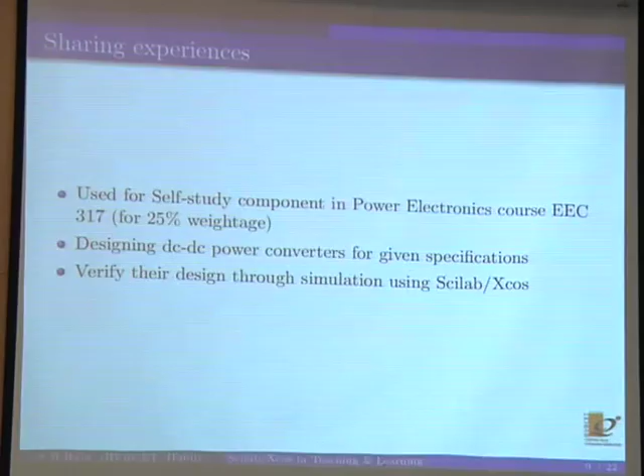For example, the output voltage must be something for a given input voltage, the current ripple should be something, and the voltage ripple should be something. These specifications are given, and then you verify the viability of the solution through Scilab XCOS simulation. This is one example I'm showing you.

This is a Cuk type DC-DC converter. Basically, we write state space equations for this converter to work, for when the switch is on and when the switch is off. These equations I use for simulation, and if you simulate it using XCOS, it will look something like this.

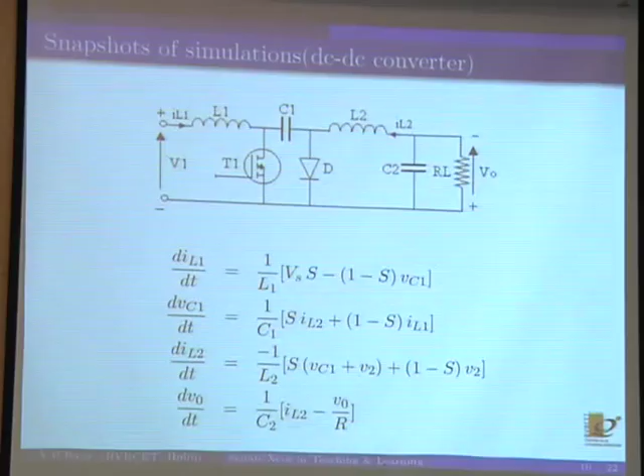If you look at this, there are four state variables, two inductors and two capacitances, so you get four differential equations. You have four big components here, so as to simulate this power converter.

I'll show the output here. The first graph represents the currents through the two inductors, and the other represents the voltages across the capacitors. I have given the specifications, and these are the simulation results for particular component values.

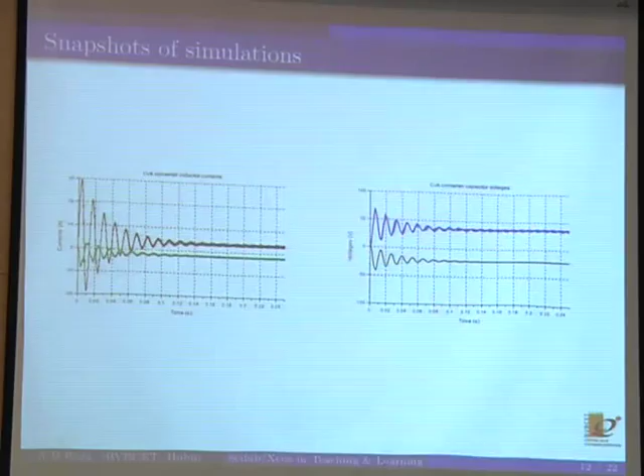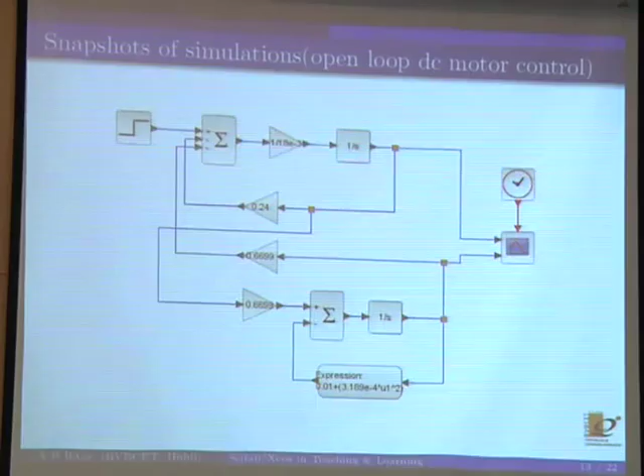This is an example of a control system, open loop speed control of a DC motor, where they study that as the load is increased on the DC motor, the speed is going to come down. Now how do I do it in closed loop? I use XCOS for doing this.

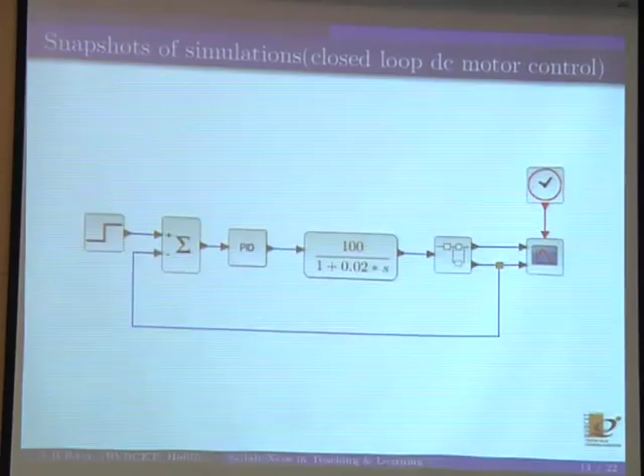On the input side, I give a step input, setting the speed command, and here there is a PID controller. The students will be changing the parameters and seeing what happens, so it's an exploratory kind of thing.

These are the graphs. For the first one, the set speed was 100, and next it's suddenly changed to 200 radians per second. This DC motor is driving a pump type load, so as the speed increases, the torque also increases, which you can visualize by noting the armature currents.

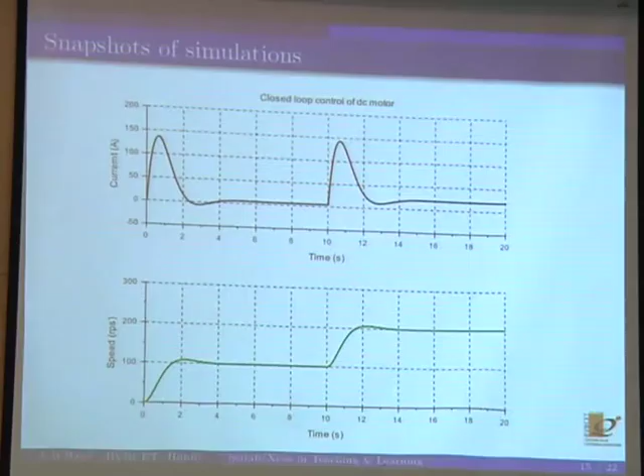I use this for the application of design of experiment principles in the electrical machines laboratory. Basically, I have a physical system or process with an input, an output, and control factors. I do experimentation by changing these control factors in a particular fashion, perhaps a full factorial design, following DOE concepts. I gather the data and then do statistical analysis to come up with a mathematical model.

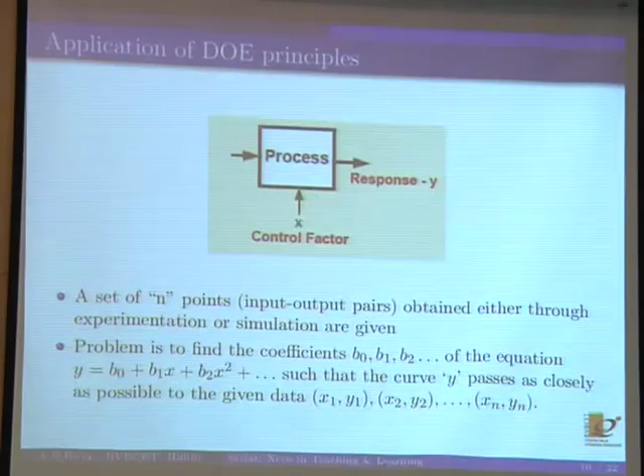The mathematical model will be like y equals b naught plus b1 x; it can be quadratic or cubic as well. This was done on a DC motor. Although in electrical engineering we know the DC machine equations and I can predict it, this perspective is different because we look at the DC motor as a black box with control factors, so this model is for statistical purposes, an empirical model type.

Unlike C, C++, etc., it's easy to learn, and emphasizes more on problem solving. You don't have to worry about the syntax etc. It strengthens theoretical concepts during problem solving because you will be working mostly with mathematics or equations. Model implementation is based on signal flow graph or block diagram approach - that's where we see the advantage.

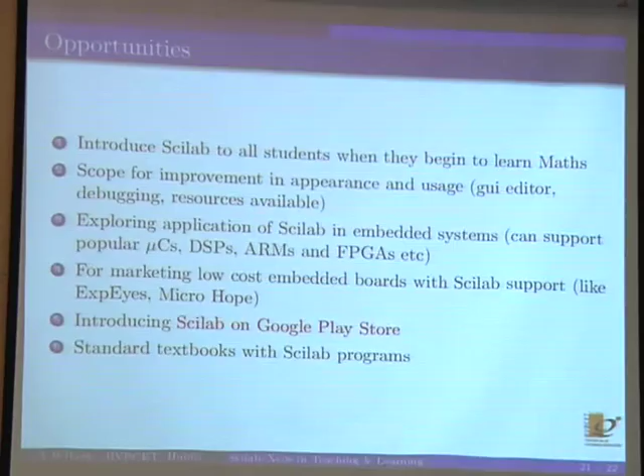Like ExpEyes or Micro Hope, and want Scilab on the Google Play Store. Then standard textbooks with Scilab programs. So far I have come across only one textbook on digital control systems by Professor Kannan Moudgalya, where he has used Scilab. I would like to see more of those kinds of textbooks. You often see more textbooks using MATLAB or PSpice etc., but would like to see more books like using Scilab. Thank you.

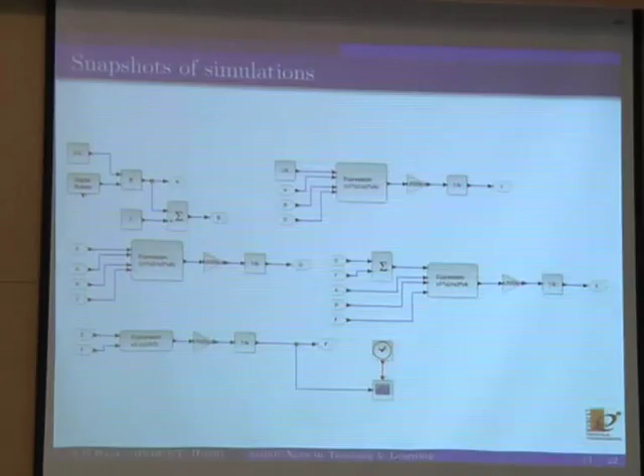Even I think Scilab code can be interfaced to this XCOS input and output. Okay, yes. And I have one more question - is Scilab a circuit solver or an equation solver? Basically it solves mathematical equations, it's a mathematical software, so it cannot emulate a circuit simulation software. Yes, yes, okay, thank you.